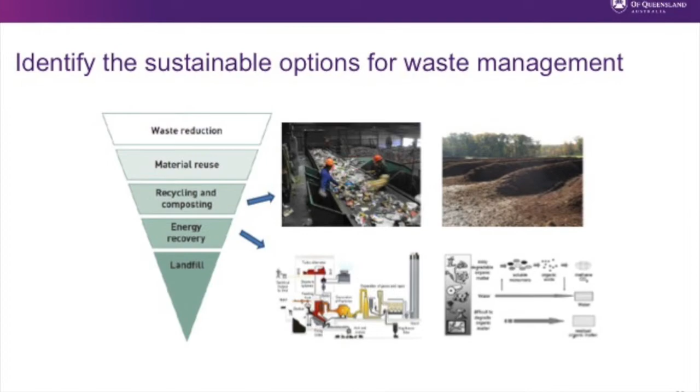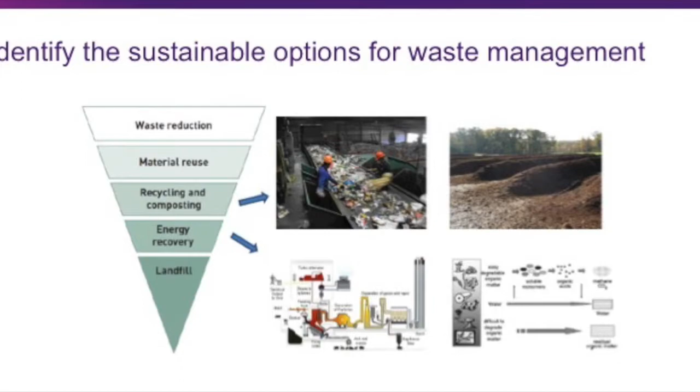Now we're going to start discussing prevention minimization, and in this section we're going to identify the sustainable options for waste management. The sustainable options that we are going to discuss now are recycling and composting and energy recovery: energy recovery through incineration and energy recovery through methane anaerobic digestion. That's a process that leads to biogas production.

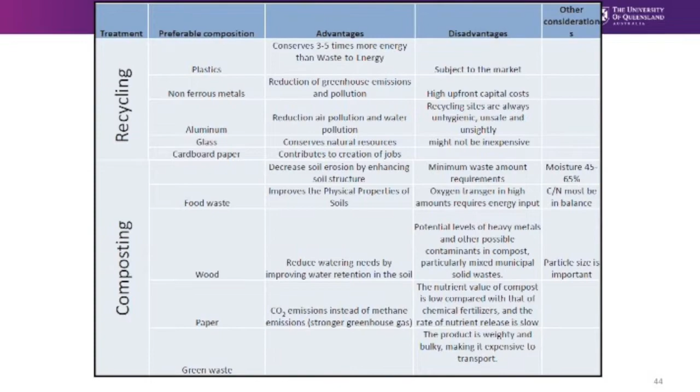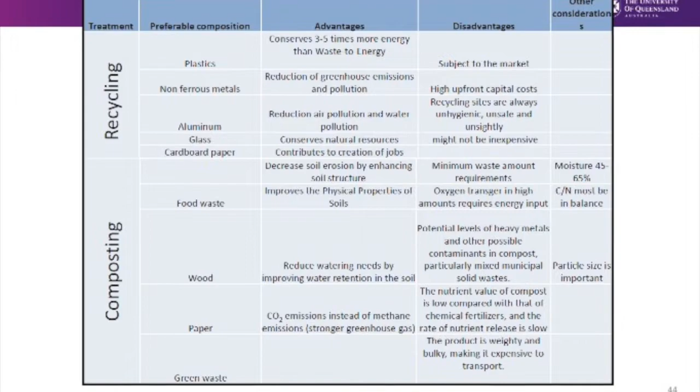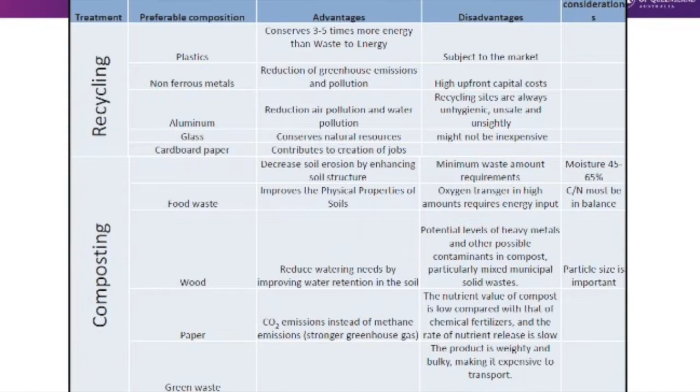So the first two options that we are going to discuss are recycling and composting, which relates to recycling or reuse of materials as well. Recycling is an ideal option for plastics, non-ferrous metals, aluminum, glass, and cardboard paper, but we can apply recycling for other types of materials. The main advantage is that it conserves 3 to 5 times more energy than waste to energy. This is because we are reusing a good, so we're not using any more energy for making this good.

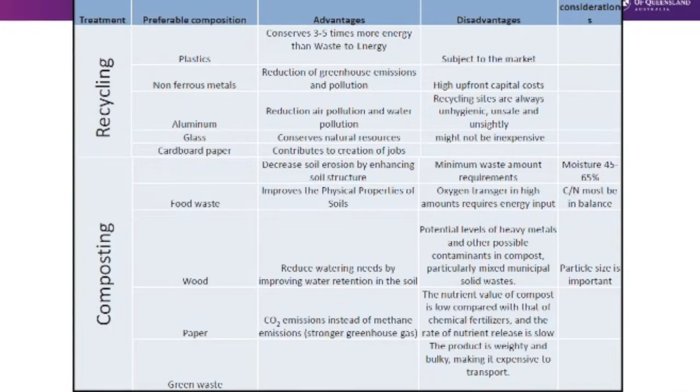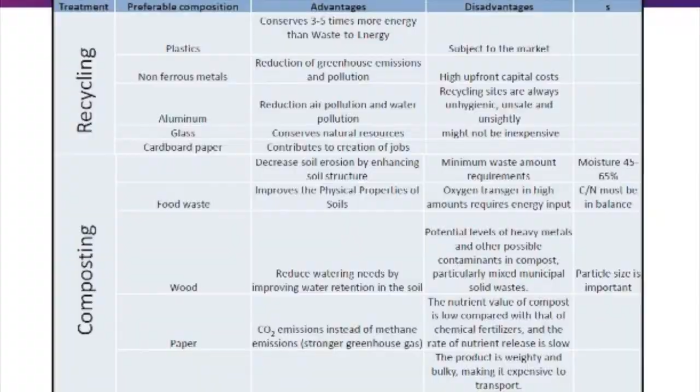We also have as advantages the reduction of greenhouse gas emissions, the reduction of air pollution and water pollution, and the conservation of natural resources, because we are stopping the extraction of this material, for instance paper, and it contributes to the creation of jobs. The main disadvantages are that recycling is subject to the market. If no one wants the material, it will be piled up. This is the case, for instance, for glass. Glass is being recycled, but there is no market for buying glass. Recycling needs high upfront capital cost, and recycling sites are not always hygienic or safe. So these are some of the disadvantages.

Composting can be applied for food waste, wood, paper, and green waste. The main advantages are that it decreases soil erosion by enhancing soil structure, improves the physical properties of soil, and reduces watering needs by improving water retention in the soil. You will still emit greenhouse gas through CO2 emissions, but these will be CO2 emissions instead of methane emissions, and methane is a stronger greenhouse gas.

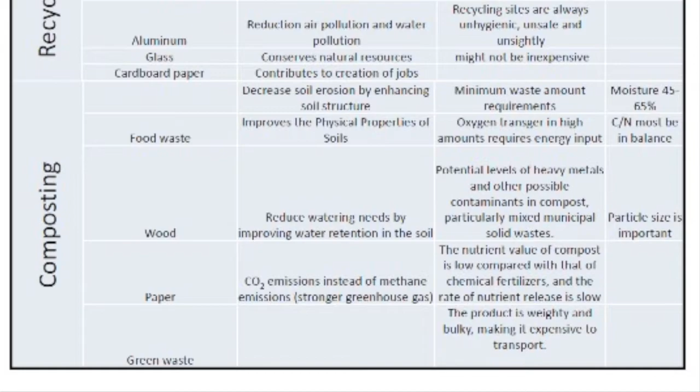Some of the disadvantages are that we need some requirements of the waste, such as moisture content, and we need carbon to nitrogen balance. We need oxygen transfer in high amounts, and this may require the addition of energy for transferring the oxygen. Particle size is important, but some of the main disadvantages are that the waste may contain inhibitors or things that can contaminate the soil, for instance heavy metals. Also, the nutrient value of compost is low compared with that of chemical fertilizers, and sometimes these fertilizers are cheaper than making compost. Transportation cost is also a problem for handling the compost.

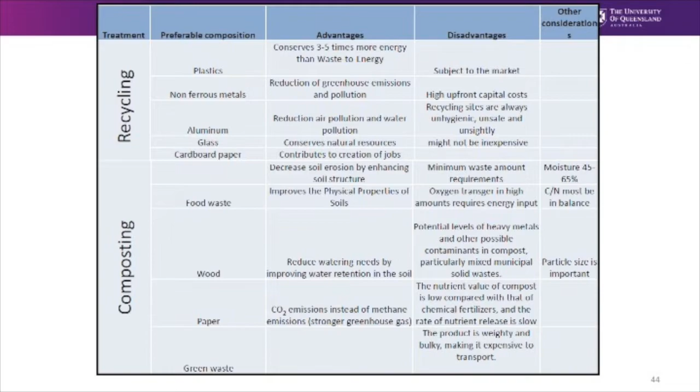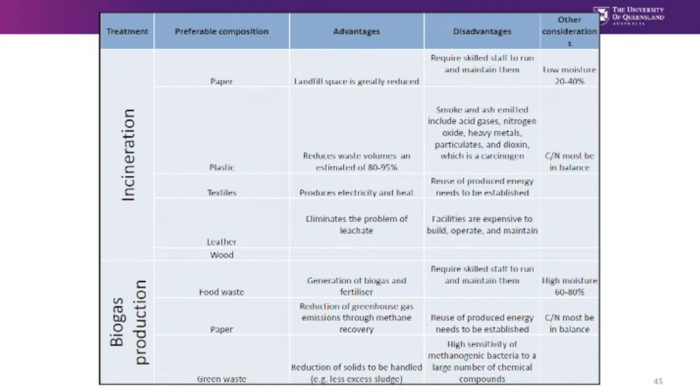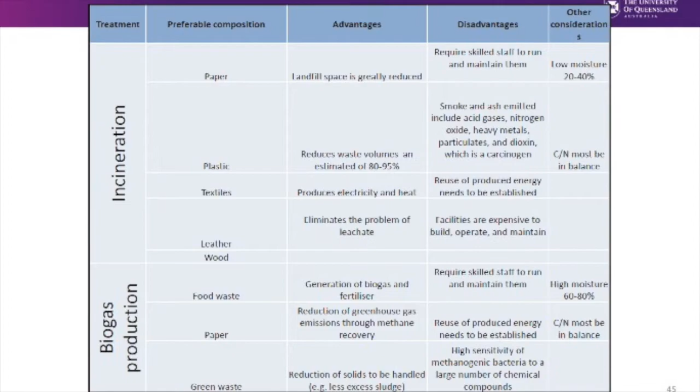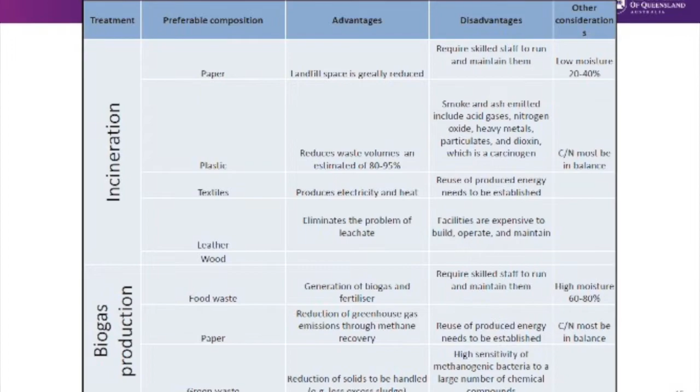So now we have what is called waste to energy, and for waste to energy we have incineration and biogas production. The preferable wastes for incineration are paper, plastic, textiles, leather, and wood. Any organic material that contains a low amount of moisture is the most preferable. These are the best options. The main advantages are that landfill space is greatly reduced. No wonder European countries prefer to have incinerators rather than landfills. It reduces waste volumes by up to 80 to 95%, produces electricity and heat, and eliminates the problem of leachate.

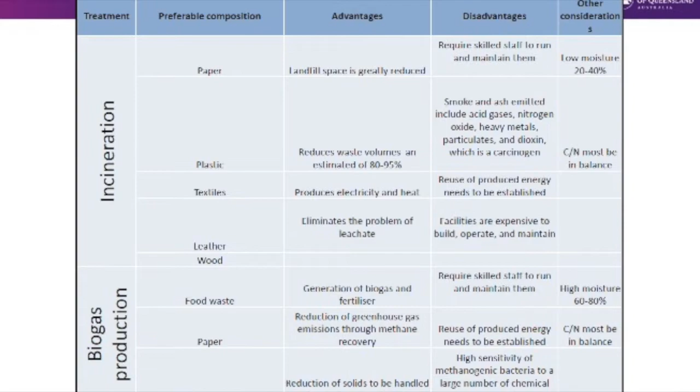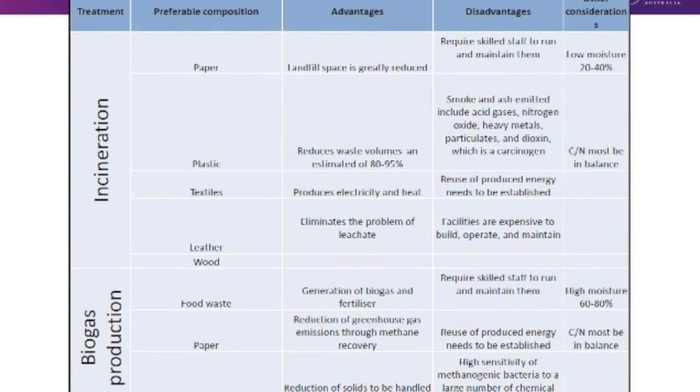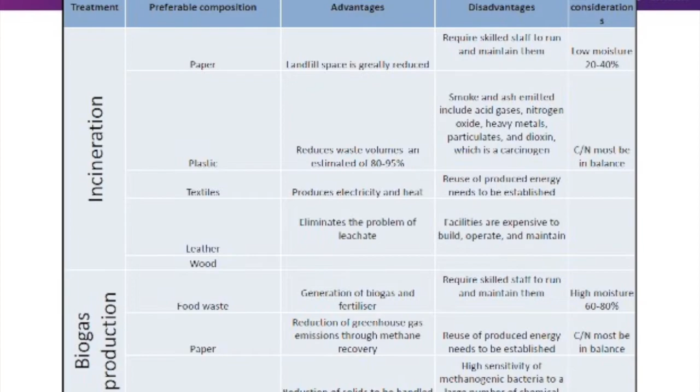The disadvantages are that it requires skilled staff to run and maintain them. The waste has to have a low moisture content. Also, carbon to nitrogen must be balanced, and the smoke and ash emitted include acid gases, nitrogen oxides, heavy metals, particulates, and dioxins that may be carcinogenic. The reuse of produced energy needs to be established, otherwise it's wasted. The facilities are expensive to build, operate, and maintain.

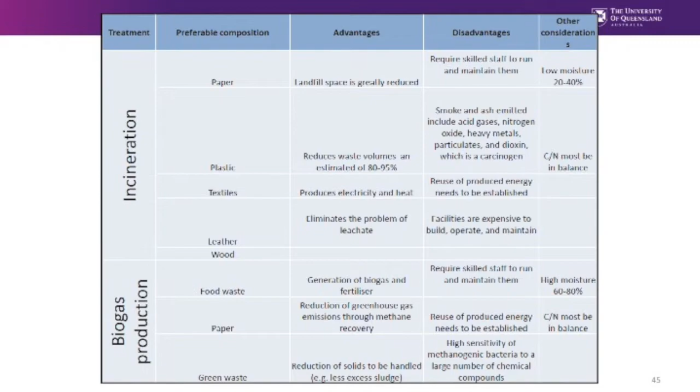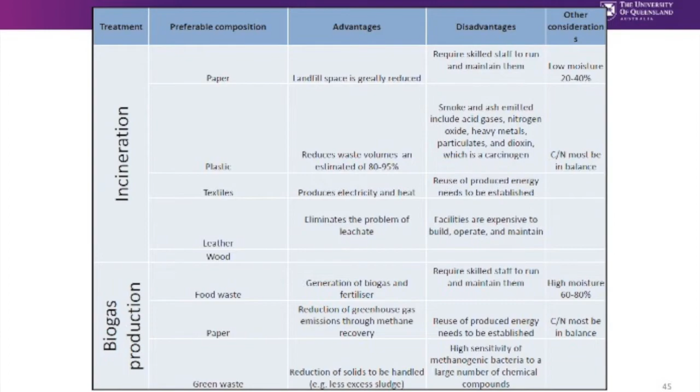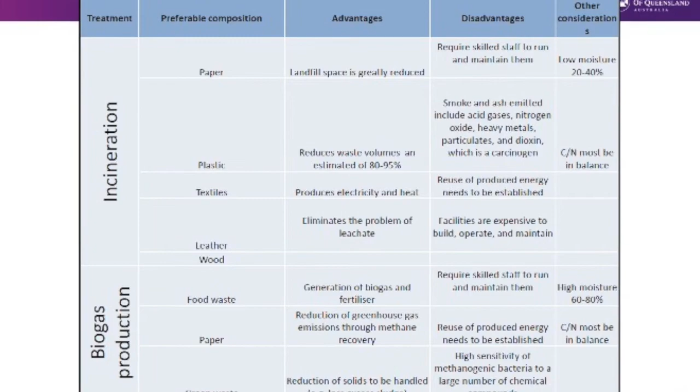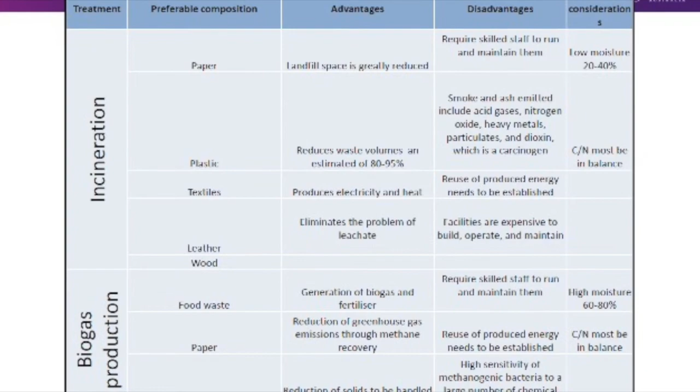So now I'm going to discuss biogas production. It is the ideal option for food waste, paper, and green waste. The main advantages are the generation of biogas and fertilizer, the reduction of greenhouse gas emissions through methane recovery, and the reduction of solids to be handled. However, it also requires skilled staff to run and maintain the digesters. We also need to establish the reuse of the produced energy, and since we are dealing with bacteria, we need to take care of the amount of chemical compounds that can inhibit methanogenic and other types of bacteria that are needed for degradation for biogas production.